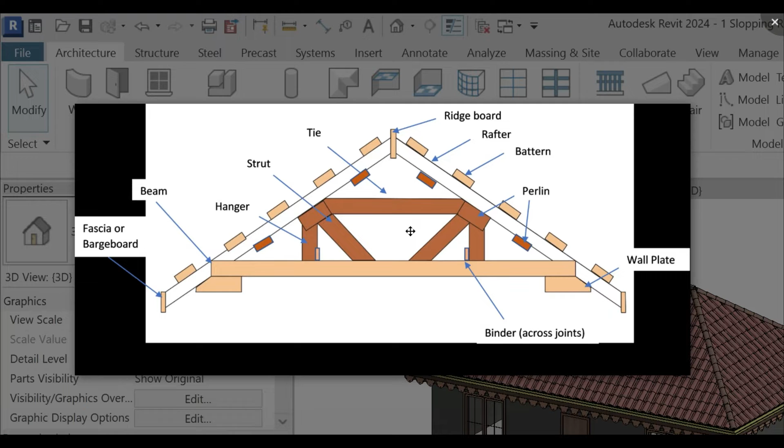To explain this better, let me take you to this particular image, which shows the hierarchy of elements for a typical sloping roof. The wall is supported with the wall plates, then we have this joist or binders, with the truss system depending upon the structural consideration, followed by the layer of purlins, then the common rafters and the hip or valley rafters. This is the configuration, and finally on top we have the battens, which will take the actual roof tiles.

So we are going to design all of this in 3D today, and I have already designed that particular thing. This cross section displays it: we have the wall plates, then the truss, the purlins, the common rafters, and the ridge members and battens which are supporting the actual 3D roof tiles.

This is the exploded view of that particular thing which we are going to design today in Revit from scratch. Also, let me take you to this particular 3D, which shows the designing of this sloping roof, which has this unequal pitch on both the sides.

This is nothing but, if you guys go to PTSCAD app on YouTube, under this playlist Revit BIM, this entire tutorial has been published, the house villa design, wherein I have been showing you how to design this particular roof.

But what I just discovered while designing this particular roof is that there is a flaw with this, a simple glitch, wherein for this project the roofs that have been designed have roof tiles which are not reaching up to this particular ridge board.

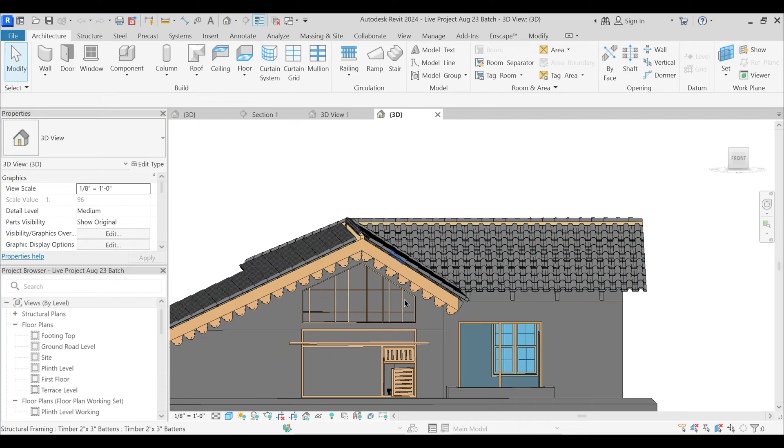Okay, fine. So that is a small glitch, and I'll just explain to you by the end of this video how to rectify this particular thing.

But before that, I'm just going to show you the basics of this particular thing, and also that tutorial doesn't display the designing of this 3D roof tiles, this ridge, this valley tiles, and this ridge member tiles.

So all of that I'm going to show you from scratch, wherein we are going to make use of different template files. We are going to start in a fresh new file, wherein I'm just going to say that wall and level 1, top constraint level 2, finish face exterior, and I'll just draw a simple small cube, select that and make a copy of it.

Okay, and I'll just go to architecture, roof, and roof by footprints, placed on level 2. And with this overhang of 2 feet, I'm just going to create one simple hip roof. And that has been created.

And why is it showing two of them? Delete. Yeah, fine, that's okay.

So now we are going to design step by step all the members. So as per this image, the first member that will follow as the wall plate.

All these steps are clearly demonstrated in this particular tutorial also, but there was a small glitch which I just mentioned, which we are going to rectify today, and it will be a quick revision. So just follow, and I'll just go to level 1.

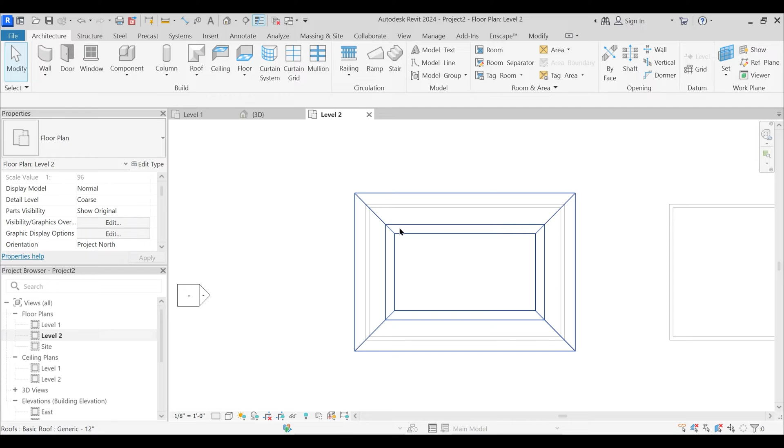So for that, I'm just going to go to structure and beam. And right now you see that by default, no beams are provided.

So I'll just go to load family, and herein I'll just go to RVT 2024 and libraries, English Imperial. And if you have properly extracted your library, then you should find this folder which reads structural framing. This is the structural framing.

And for this exercise, we are going to use these wood members. You can use anything, the modeling process remains the same, whether it is concrete, RCC, steel, aluminum, or anything. But for today's exercise, we are just going to use this timber.

Okay, fine. And I'll just open and load this particular simple beam family. And now if you just go to this family section and expand it, then under structural framing, you would have loaded that timber beam structural framing.

Which reads 4x6, and just go to right click, edit type, and open up that template file. Herein I'm just going to go to family types and make a small change, wherein I'm just going to make this structural material, which right now is an instance parameter, into a type parameter.

The reason being, I'll explain you while doing the modeling part why I need to change it into the type property and not the instance property. I'll just explain, so just try to follow.

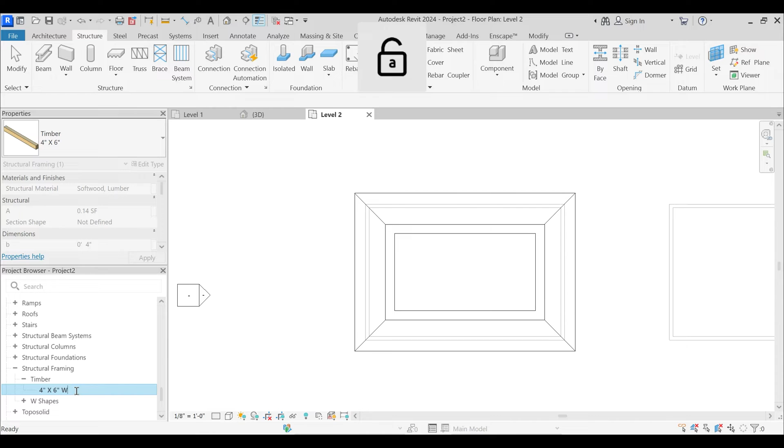I would just like to be specific because we are going to define a lot of them. We are going to design a lot of different members within this one family, so I would just like to be specific.

Okay, fine. I'm going to drag this particular beam and snap to the center of this one to two. I guess that has not snapped properly. Let me just hide this particular roof and drag it from here to here, from here to here, and all of them.

Okay, let's just go to 3D. You can see that the wall plates has been laid on the periphery of all that particular walls. Select all of them, SA, and just change this Z justification to bottom, and that will elevate all that four members properly.

Now, in order to visualize that, I'll just select this particular group roof, go to right click and override graphics in view by elements, and I'll just change this transparency to something like 70. You can visualize what is happening, have a see-through, and see what is happening below.

Let's just change this bit more. Override view and elements, and oh, 20, not 20, 70, and okay.

Yeah, fine. So the next will be the ridge member and the hip and the valley rafters. I'm just going to make a duplicate of this.

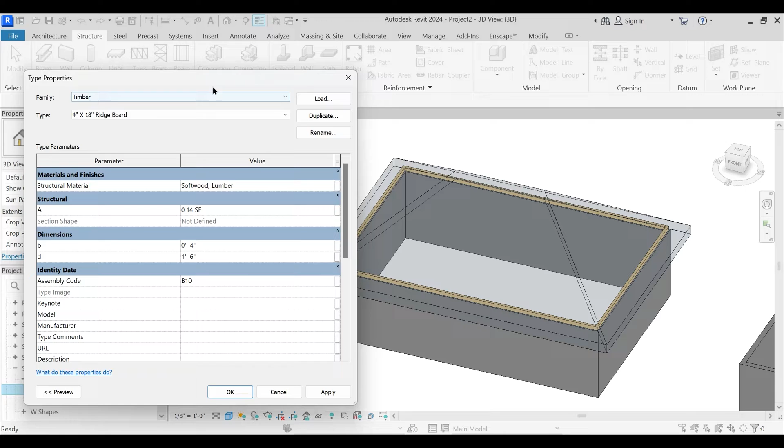Okay, and this should be 18 inches, and the depth should also be 18 inches. As I said, all the dimensions and everything will be pretty much basic and conventional. You can change it according to your design.

And herein this will be 15 inches, which will be the valley rafters. Here too I'm just going to change this to 15 inches. One more, which will be the same size, but those will be

common rafters, and valley rafters, rename, and rafters. Okay, fine, apply and okay, that's okay. So now the four different types have been defined within this one single family.

So what I'm going to do is lay this ridge board. Just drag and drop, and with 3D snapping on, very important, just snap to the uppermost point and here. Okay, so that member has been laid.

Now this next will be the valley rafters. Just drag and drop, select this point and select this point and this topmost point. Okay, so that has been laid.

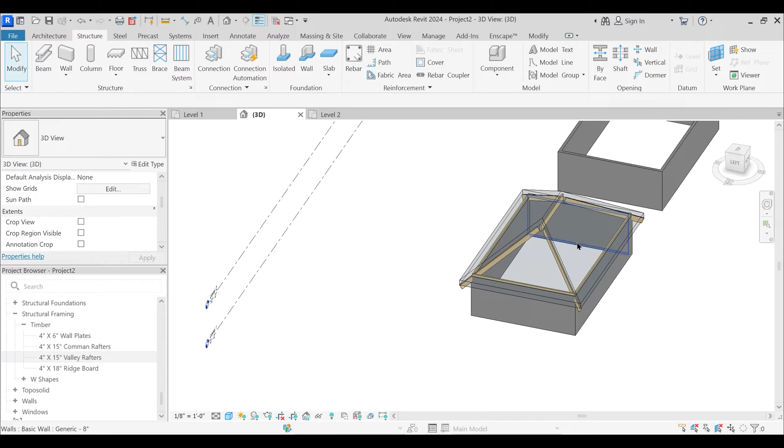From here I will just select this, and from here to here, yes, and this to this. So all the ridge member and the valley rafters have been laid, but we need a differentiation.

So the reason for changing that material part into a type parameter, I'll just come into it. I'll select all of this, SA, and change this Z justification to bottom, and also this Z justification to bottom. The reason was that I wanted to define a different material for all of this so we can have a differentiation.

So I'll just go to the particular ridge member, edit type, and you can see that now we can assign a different material to this. I'll just open up that material dialog box.

And from here in, I'll just open up wood. I'll just type in wood. I'm just going to copy a few of the existing materials defined by Revit, which we are going to use for this particular modeling purpose.

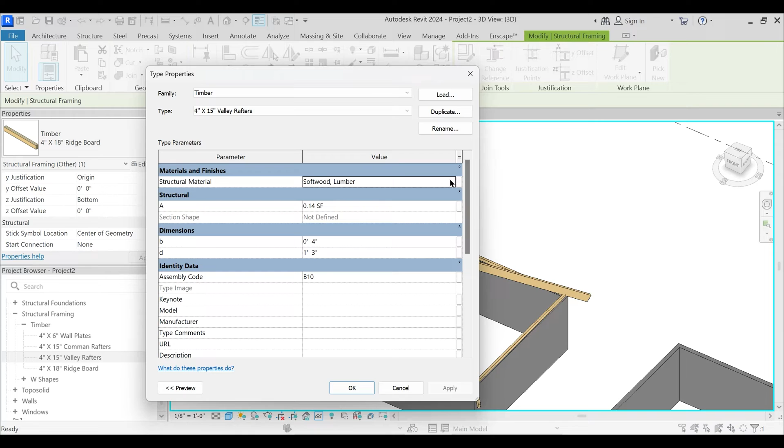And here in this material, I'm just going to use it for that ridge member, apply and okay. Also for this valley rafters, I'm again going to use that same dark material that we just loaded. Okay, apply and okay.

So you see that if I just change this to realistic, then it has changed that material to the one that we just selected.

With this, now I'm just going to take this a bit until it snaps to that particular point. Okay, and just take this a little bit. And just select this two, and drag it. Yes, and this two up till this point.

Now, if you want to have a perfect connection, what method do you need to follow? I'll just show you once we lay these particular common rafters.

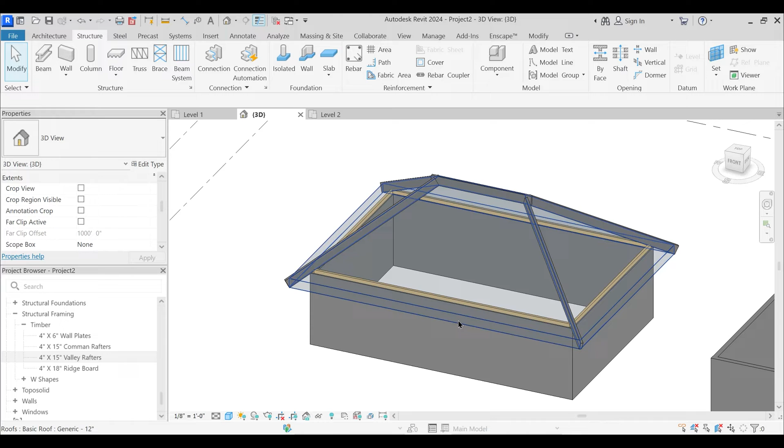So with this, I'll turn on HR and CC again. Now what we're going to do is use this roof, which has a thickness of 12 inches, as a reference to lay the different members of this typical roof. Here's the point where the glitch comes in, which was made while designing this, and the reason why these roof tiles don't reach up to this particular ridge member. I'll explain that.

The reason was that for defining these common rafters, the system I need to follow is to go to Structure and define a beam system. BS is the shortcut. For that, I need to set a plane, and under that set plane, pick a plane. What I did earlier was select this bottom plane, but with that selected, it will not lay those members properly. In order to visualize and lay the members properly, you need to select this top plane instead.

Just select that plane and define a beam system, and I'll turn it to HL so we can visualize those lines. Here I'll create system 1, 2, 3, and 4. Now it's very important to define the beam direction, so I'll select this particular beam direction line. From the center you can click anywhere, but you need that exact perpendicular line defining the direction. You see this dotted line, this dotted gizmo, says that this line is now exactly perpendicular.

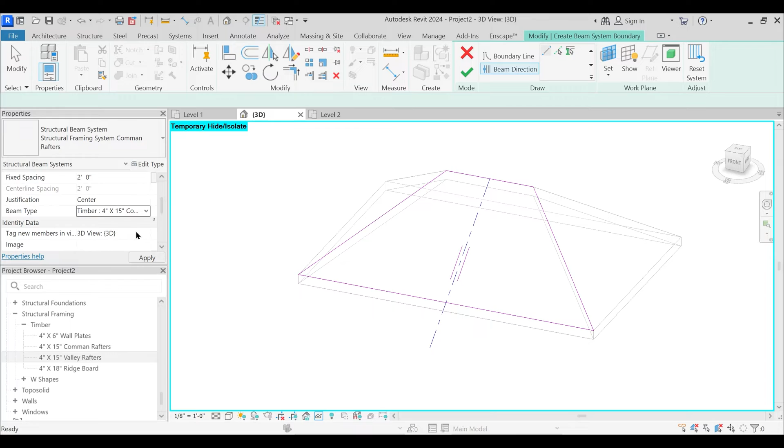So with that, all the common rafters have been laid. I'll turn on CC. Here we have just these two small members, which I'll unpin depending on - let me change this to 25 inches, and that will just get rid of that particular member. Or else you could just select this one member, unpin and delete it. But instead let's use a different size, because size may vary.

So now you see these common rafters are reaching up to the top ridge member, which in this case they are not. If I highlight, you see these ridge members are stopping here and not reaching up to this ridge member. So the only flaw or glitch was defining the work plane, which is very important in Revit.

Now what I'll do is select one of them, go to edit type, and define a different material - existing material sash - for this particular common rafters.

What's the next step? The next step is to now define the purlins. Actually, we were supposed to lay the purlins first - that's fine. I'll select all of them and hide, and I'll also select this beam system and hide it. Now the purlins we're going to lay, which will support this ridge member - these are the purlins - see, those are going to be laid on the bottom of that rafter.

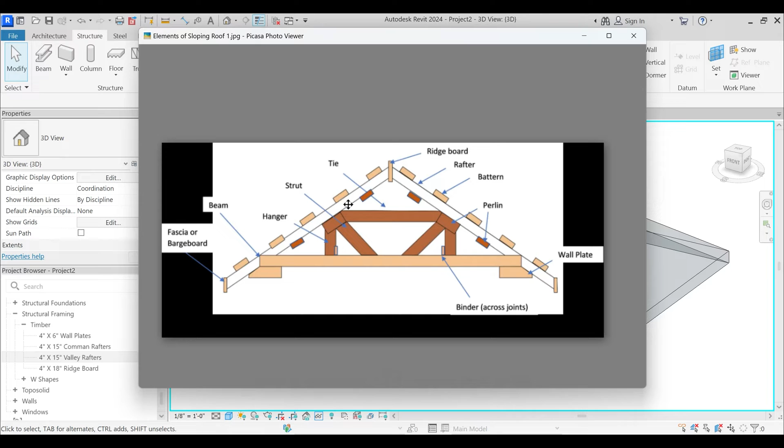So in this case, we're going to set pick a plane, and now the work plane we select is going to be this bottom work plane. I'll select this bottom work plane, beam system, edit type, and duplicate - these are going to be purlins. The reason for duplicating and renaming and creating this structural system every time is that it will help in the modeling part later. So you'll witness this.

I'm going to change the spacing to 3 feet, and since we don't have the type defined, I'll duplicate this type's properties - this is going to be 6 by 4, and those are going to be purlins. I'll reverse this dimension and set the depth to 4 inches.

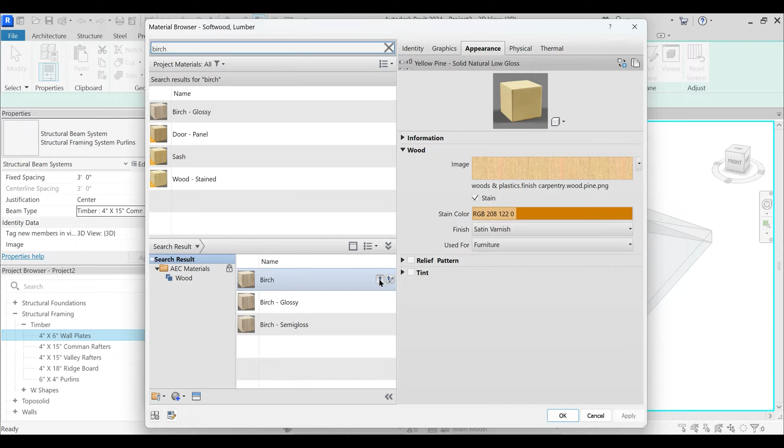Okay, for the material, I'm just going to define existing material that we have already loaded. Yes, birch. I want this not glossy, but simple birch. Okay, apply and okay, apply and okay.

Fine, and now for this particular thing, since that particular purlin has been defined, I can use those purlins for this beam system, but why is it not allowing to? You just need to click in this particular space, beam type, and get out of the command. Drop down and select timber 6 cross 4 purlins, with a distance of 3 feet, and very important, the beam direction.

The beam direction, no, but first we need to draft the boundary lines. The boundary lines are going to be the bottom plane that we selected. Okay, and the beam system and the boundary and the beam direction. Yeah, this is proper. Actually, you can just snap it until the dotted line pops up showing that it's perfectly perpendicular to this plane.

Okay, just hit the checkbox. Fine, so your purlins have been laid properly. Only thing you need to do is press HR and just check here. And what you'll notice is that here there is a problem wherein the last purlin, I guess, is getting cut off.

So let's go to level 2 and change this. Okay, and just drop a section. HH, and yeah, so see here there is a problem. Just select this particular thing and change the spacing, let's say to 4 feet. Okay, and it's absolutely perfect.

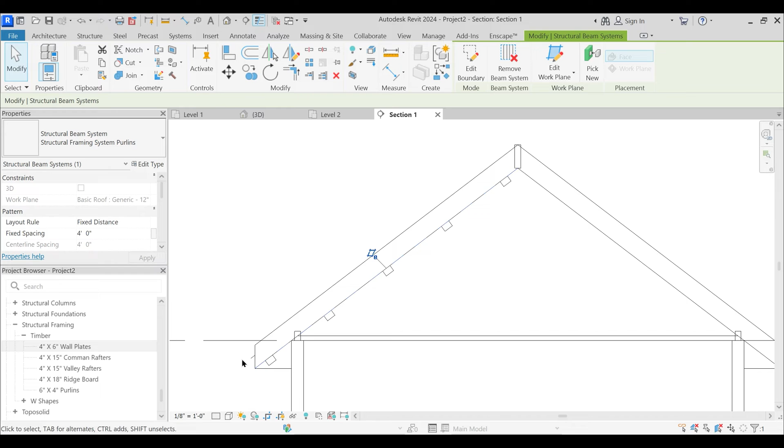Okay, so the purlins have been laid, the ridge member has been laid, the common and the valley rafters have been laid. Fine, and R enter. Yeah, fine, so we have a differentiation.

wherein we need to have a clean joint. Of course, the machine will adjust it on site, but since we are talking about the modeling part and modeling concepts, I would like the things to appear perfect. Right now you can see that the things are overlapping, and the members are overlapping and getting inserted one within another.

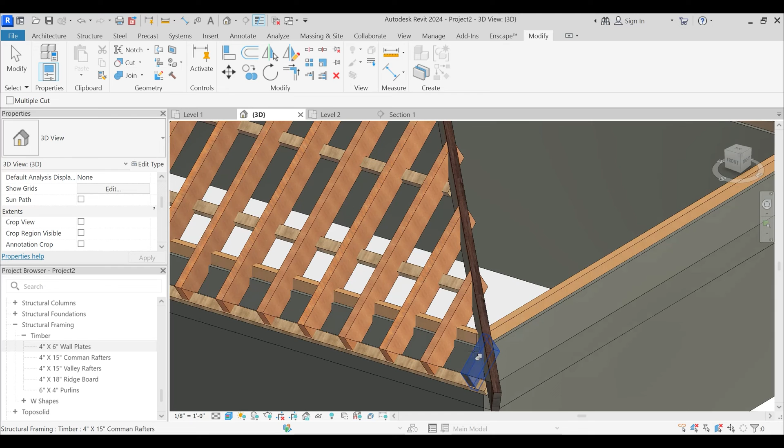So the trick in this case is that you need to select this very powerful command, very important command: notch. Select that individual member and select the member which you want to create the notch joint with. Let's check it for one. And if you drop this down, you have this notch distance, which I'm just going to change to 0. Yeah, but no, that is still not proper. Let's just try it for this, 0.

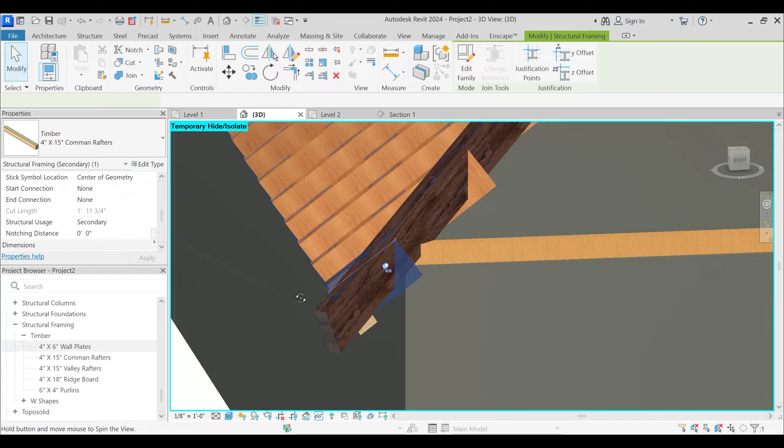I guess that is... let's just HH and hide this particular roof, and notch, select this and this. Why is it not? Yeah, the notch has been created, but because of the way it has been laid, it is not creating a clean joint.

Fine, when we lay these members, then we will understand what needs to be done. Okay, so just HR, and now for this particular face, I'm just going to create both, that is these purlins and these common rafters. Actually, it should create a notch joint. Why is it not? Okay, fine, let's not waste time on that and let's proceed on with the modeling part.

Okay, and again I'm just going to HI and select this roof, isolate this roof, go to structure, set plane, pick a plane. This time I'm going to select this top plane. But let's lay the purlins first. So pick a plane and the bottom plane, and go to beam system, and we already defined those purlins.

Okay, HL, and just draw those four lines, 1 to 2, 3 and 4. Okay, and say that the beam direction should be from here to this. Okay, and rest all the properties same, that is the fixed distance, but I guess that we use 4 feet for that.

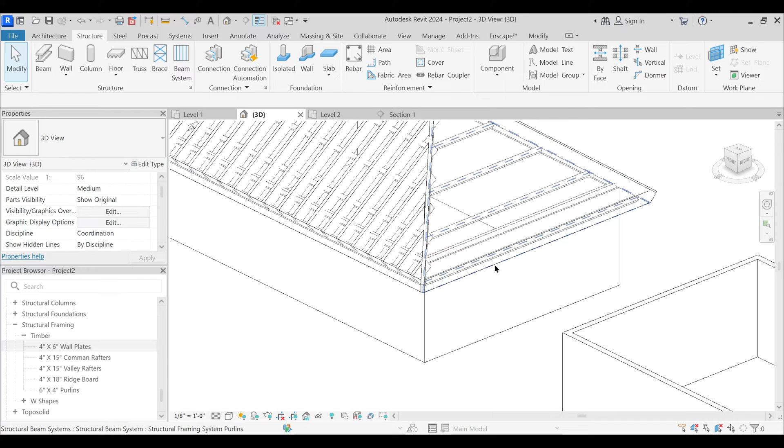Okay, and HR, is that corresponding? Yeah, see, this is exactly perfect. Okay, if I just take you to this particular top view, then you see that the connection follows. Fine. Okay, now the next is that we have to define again, select CC and that roof tab.

Tab until you select that particular roof and isolate it again, and go to set plane and pick a plane. This time, since we are going to lay the common rafter, I'm going to select this particular plane and go to beam system, drop down, and select common rafters.

And the moment you select it, since this is an instance parameter, you have to change it from here also, change this to common rafters, and the fixed distance should be 2 feet. I'll just draw a line: 1, 2, 3, and 4. The beam direction should be essentially this. Okay, 2 feet distance, 4 cross 15 common rafters, everything is perfect.

Hit the checkbox, okay, and now turn on this. So now it is very important to have a proper connection.

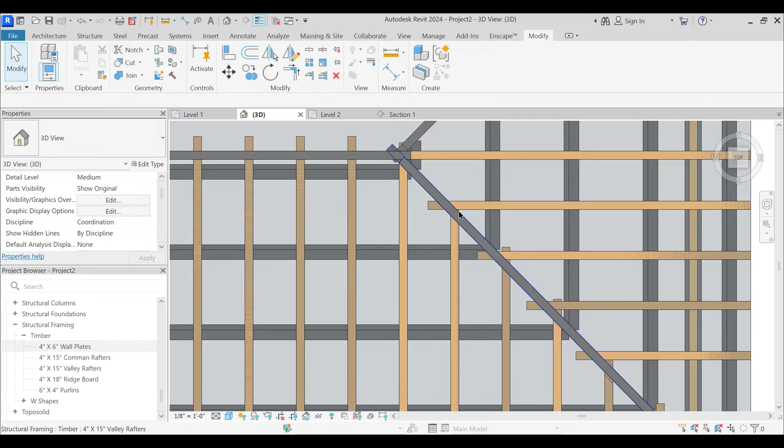In order to make this particular connection appear properly, let's just try that same command, that is notch this to this. Yeah, see, and this to this. But again, I guess that something is the problem here, which we need to figure out.

For that, let's go to this section and turn this to fine. Okay, yes, the common rafters which has been laid. Let's turn on this roof profile. HH, and this is the roof. Okay, and these are the rafters. Yeah, see, the thickness of that particular roof is 12 inch.

But for this particular rafters, let me turn on to CC and no wireframe. The common rafter that we have laid, edit type, and you see that its depth is 15 inches. So we actually need to flush this in order to have a notch connection. We essentially need to notch this, and you see there is a 3 inch difference. Okay, so that is the reason.

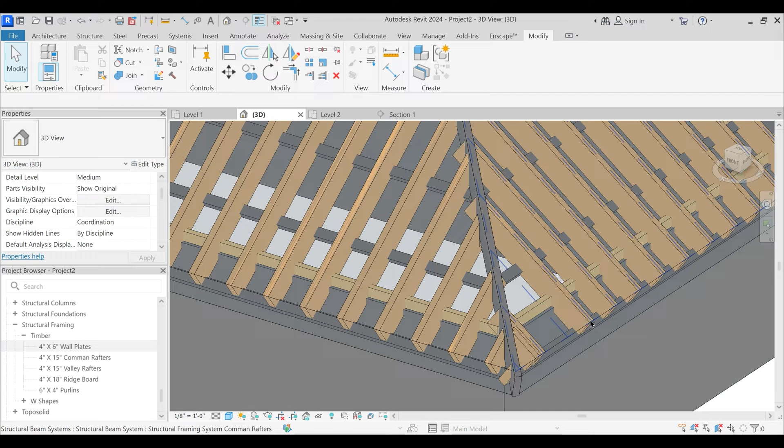Also one more thing, if you just select this particular beam system of common rafters on top, which is exactly on the top, if you select this, then the fixed spacing distance is 2 feet 1 inches. So that same should pertain here. What I will do is press tab until I select this beam system and say that the fixed distance should be 25 inch.

Okay, remove notching, fine for now, and that will flush. At the same time, select one, that will select all this particular common rafters, and with Z justification to top, the Z offset value should be 3 inches. Okay, and with that, now if you just see, then that connection is flushed. And the extrusion that we have is on this face, 3 inches. Yeah, fine.

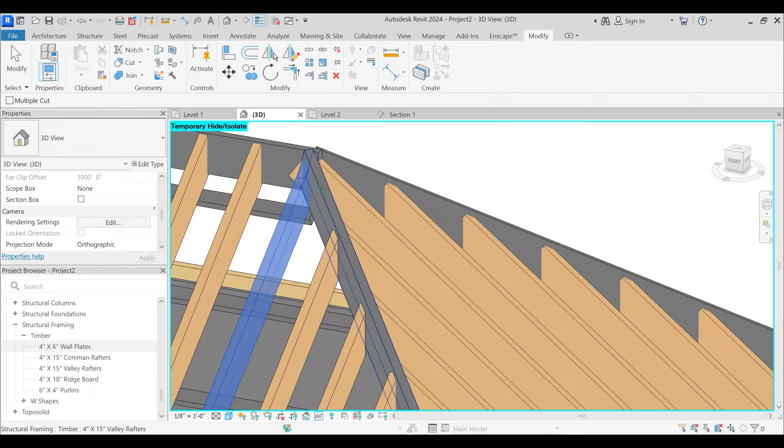So now with this, if I just go to 3D and hide this particular roof, and now if I just apply notching to this with notching distance to 0, and this also, let's try it for all these members. Notch 1 to 2. Yeah, fine. And with that, you see that we have the perfect flush connection that we wanted, and you have to do it for all the members.

Let's check whether, okay, and then select the peripheral members which are connecting with this valley rafter, and with all of them selected, just change this notching distance to 0. Okay, and with that, now if you just check in top level, okay, and we have a flush connection. So that is how, one step you perform, and then okay, so with this now you see that we need to notch this as well.

So notch this member with here, yeah fine, and likewise notch all of this to this valley rafter, and just drag it a bit. Select both of them and say that the notch distance should be 0. Okay, and that will perfectly join. Likewise here too.

See, if I just select all of this, 1, 2, and all of that will now perfectly create a flush connection. Okay, and with all those members selected, just change this notching distance to 0. And at the same time, we need to apply the notch joint here as well, but let me just drag it a bit here, and this should follow.

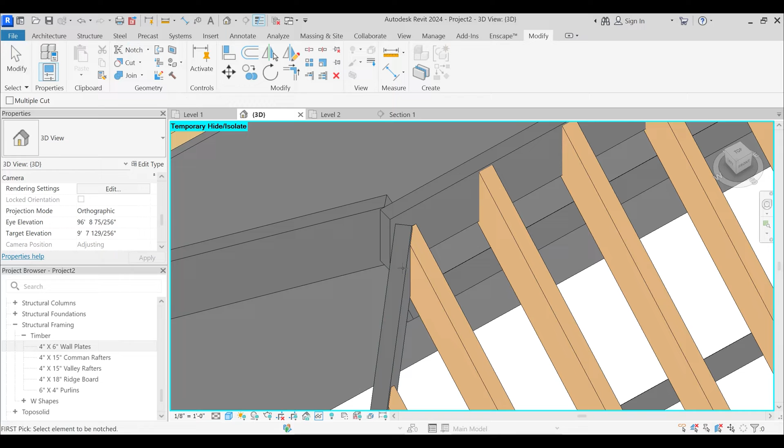Irrespective of this, the machine will follow the conventional method and join this. But since we are talking about the modeling part, so that's why I'm focusing so much on it.

Yes, notch this to this as well. Notch, and yes, we need to drag it a little bit. Okay, select both of this and zero. Fine, and we have a clean joint.

What we just need to do is change those, again define a different system and call it battens. You also need to change it here in instance properties, wherein right now it is reading purlins, so you need to define a new type. Go to type properties, duplicate this, and call it 1.5 cross 1 inch, and that should be battens.

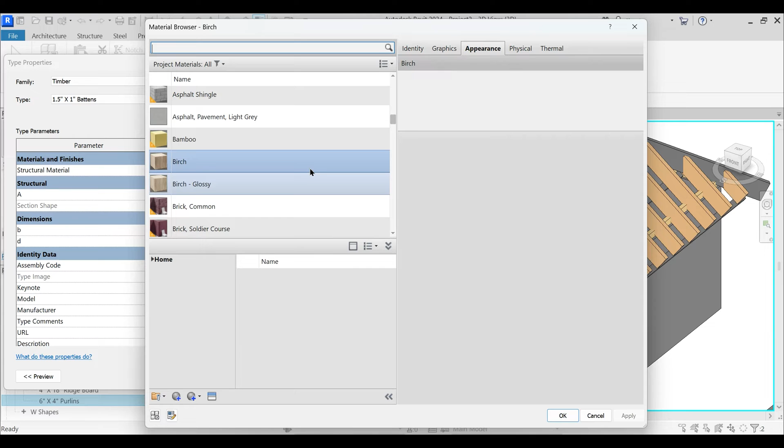Its size you can decide: 1.5 inch, cross 1 inch. Okay, and this material should be birch, so we'll have a differentiation. Okay, and with that, just click in the space.

Where is that? Yeah, battens. With that selected, just change this particular type to battens. Okay, so with that, the thing is done.

So those battens have been created, but they are right now at the wrong work plane, and also the fixed distance, the fixed spacing should be only 15 inches. Likewise, we also need to select these battens and change this fixed distance, all of which are instance properties, so you need to change it instantly for all of them.

Change this to battens. With this, now just go to section 1 and select all, so all of that will be selected. Just press move, and with this join, yeah, but it might have selected the battens on this side also. So just do one thing, select all, battens have been selected, deselect this one on this face, and go to section 1.

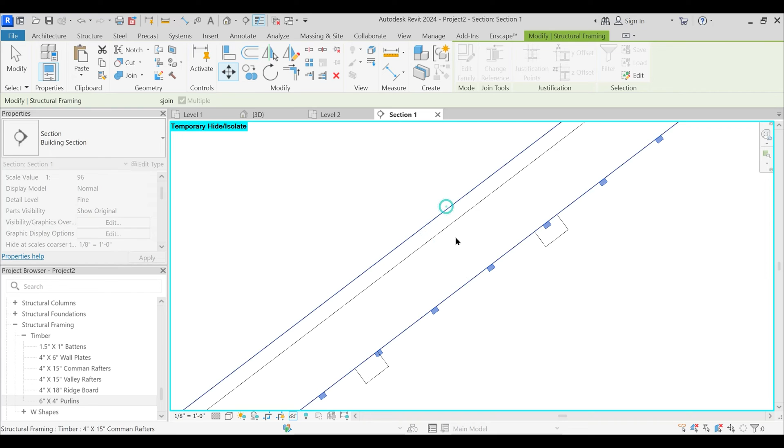With that, now you'll be able to move this and join, and still not. Why is it not snapping? Move, and why is it not selecting? Select all, let's go to top, and let's deselect this. Also let's deselect this. I guess there is a problem over here.

Let's just redo this part, compute it for this face first. Okay, let this system be there, battens. And from here I will select all of them. So the one created on this face has been selected, move and constrain, and yeah, see now the snap point is coming, which earlier was not coming. So you need to be very particular.

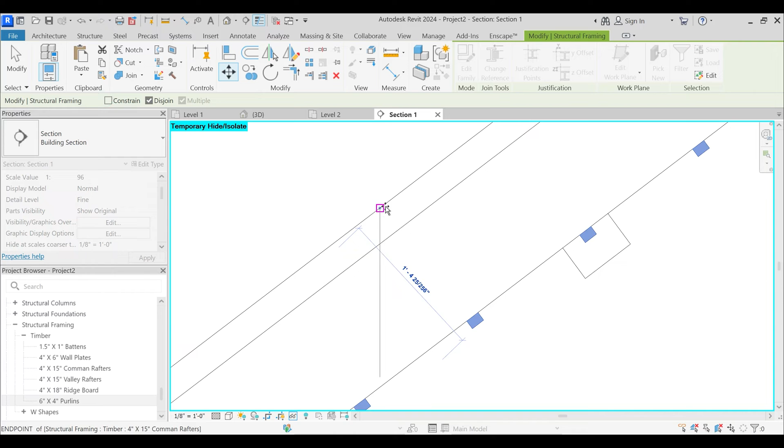Move, enter, constrain uncheck, and with this disjoin check, just move it from face to face. I hope this should have laid it properly, perfectly. Okay, fine, so that has been laid. You need to get rid of these extras, delete.

Now we will select this batten, the batten that we created on this face, and change this fixed distance to 15 inches, and this to battens. Okay, so that has been created, but we need to do it properly.

Select all, and deselect all of this. With that selected, if you just go to section 1, you cannot visualize it because that is the vertical section. You need to draw a horizontal section, go to that particular section. Fine, so we can visualize those battens.

Now again coming to 3D, I'm just going to select one of them, select all, shortcut is SA, that will select all of them. With that, just go to section 2, and with all that selected, just move it, with constraint unchecked and disjoin checked, move it from this point to this point.

Once again, why is that doing it two times? Yeah, fine, okay, so that has been done.

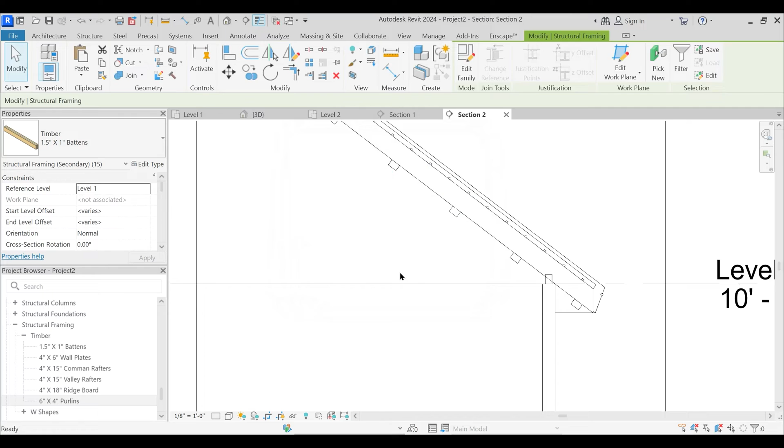If I just change this to... oh sorry, just press undo and turn it to fine. Again coming to 3D, select all of them, and deselect them. We snapped it to the wrong face, so move, enter, with constraint unchecked and disjoin checked, just move it.

And fine, that has perfectly moved it in place. Okay, and just get rid of this one element, you don't need it.

Okay, and with that all the members have been created perfectly. Fine, no issues.

Now the last part is that we need to define the actual floor roof tiles onto this particular face in order to complete this. Okay, so let's just do that pretty quickly.

For that I'm just going to use a different template file of Revit, where I'm going to say file, new, go to family, and change this to family templates and English Imperial, and change it to curtain panel pattern based. We are going to use a pattern based family for this.

Okay fine, so I'm just going to change this size to, let's say, 15 inches across 1 foot. Now from here, I guess that this should be 1 feet and this should be 15 inches.

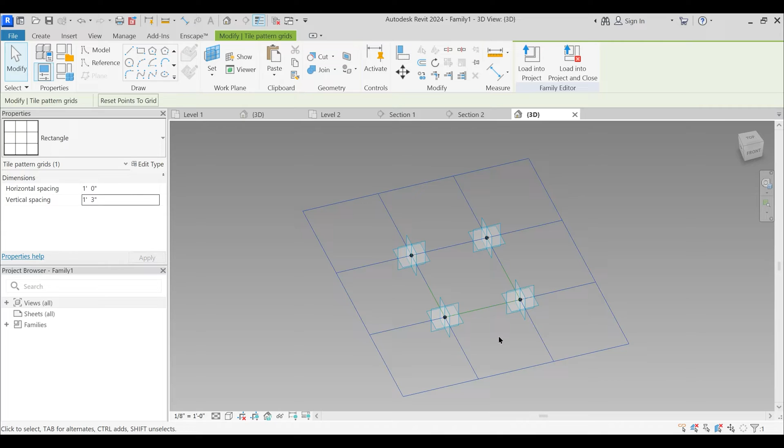Okay perfect, now I'm just going to select this particular set plane, set work plane, and select this plane associated to this point, this adaptive points. Okay, and just go to front elevation.

Okay, say that model lines, center-ends arc, radius, click to center, expand, and just click 3.25 inch. Okay, and then three and a half, come to this point and draw all the way to this point. Okay, so that arc has been created.

Fine, now one another, again click that same. If the radius of this is 3.5, so this should be, click this center, 3.25, 3 and 1/4 of an inch, and click this point, center-ends arc, 3 and 1/4, come all the way down till here and then draw it.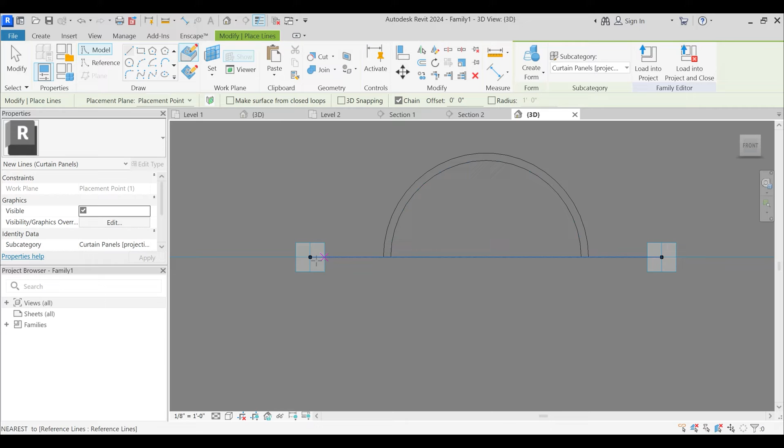Okay, fine. Now let's first draw the horizontal lines, so I'm going to draw a line on that same work plane from here to here, just come up 0.25 inch, and then join it. Okay, and I'm going to use this particular split element tool and split both these lines, and join this to this and join this to this.

Okay, and with this I'm just going to select this entire element and move it, let's say 1 inch, and that would be 1 inch high. Now what we are going to do is create the same section with some different dimensions, but on this work plane.

So what I'm going to do is set work plane, and now this time this should be the work plane. Okay, and then again go to front elevation, and this time center and arc, click snap to the center, but go only 3.25, 3.25. Okay, click snap to center, and let's say that 2 and 3/4.

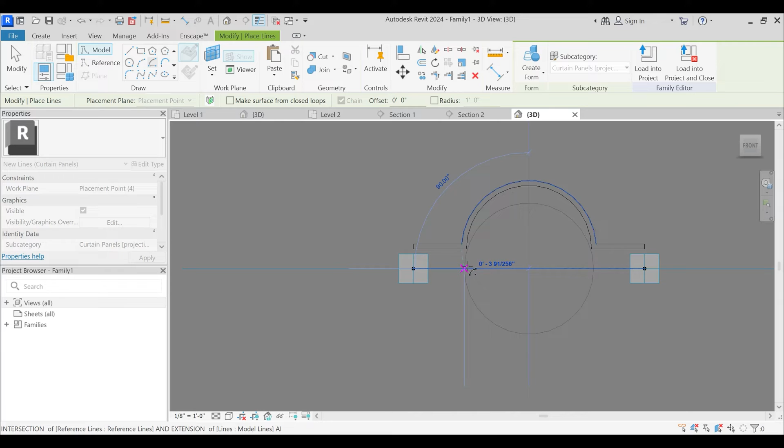No, 2 and 3/4 would be too less, it should be 3.5. Okay let's create 3.5, and then complete it. Okay, select this and change this to 3.25. Okay perfect, and then one more, and that should be exactly 3.

You will not follow right now what I'm doing, but once I complete this exercise, then you will get to know what was the purpose of doing this.

And just, oh, created on the wrong face, and 3, and just drop, and yes okay. And now this same lines, 1 to 2, and 1/4 inch, and thus join them.

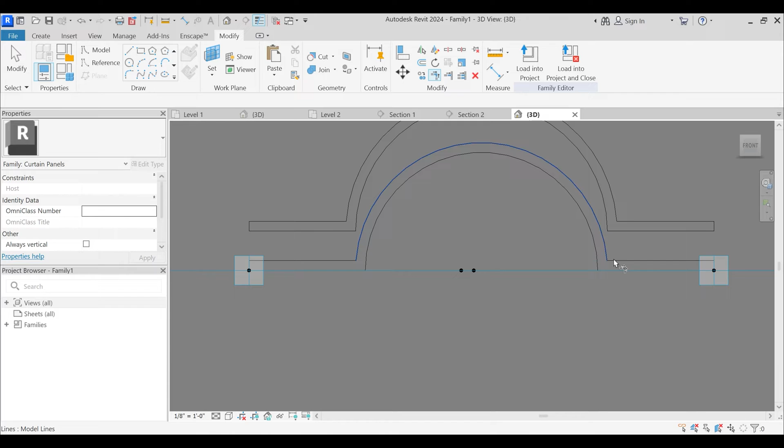Okay, and with this split elements tool, just 1 and 2, and join this, and join elements, yes, but I guess we need to split it, and see it left, so it doesn't matter. Create one more line over here from this point to this point, okay, and that entire element has been created.

What we just need to do is select this and go to top, and move it with constraint unchecked and disjoint checked. Just move it 1.5 inch, okay. And with that, select this both and just create form.

So now, do you understand the purpose of creating these two different cross sections? The reason being that I wanted to create this style in such a way that when it overlaps in the project environment, it should have this overlapping volumes. So when you have a water runoff, the water doesn't penetrate in. The cross section on this side is larger and this is smaller, and also it has been given a displacement of 1.5 inch. So this was the purpose.

Now what we just need to do is select this entire chunk and material, just create one material, roof tiles material. Okay, and we don't have that.

So we need to create one. So duplicate, and just call it roof tiles material. We will change it directly in the project environment, but right now I have just assigned that.

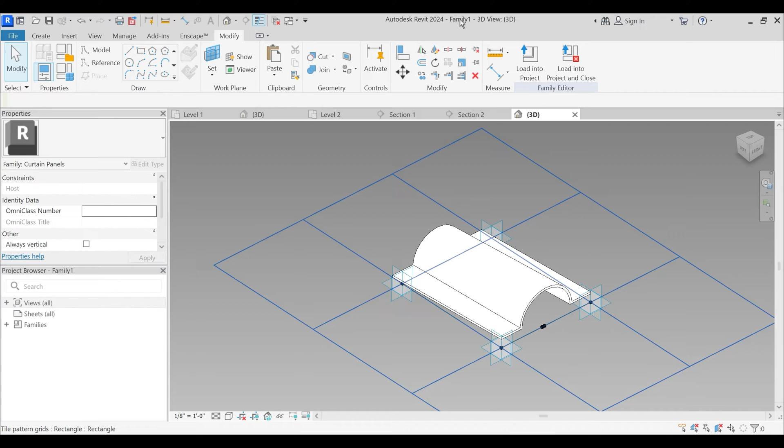Also now this family 1, we have to load that into this particular project. So I will just load that into the project. And herein, if you just go to curtain panels, then that family 1 has been loaded.

I'll just rename this and call it roof tiles, and also rename this roof tiles. If you just go to type properties, then you see that the material parameter didn't pop up.

Let's go to the, let's delete this because it's loaded in the project environment, so we don't need it anymore. And then right click this and edit it. Roof tiles and edit it.

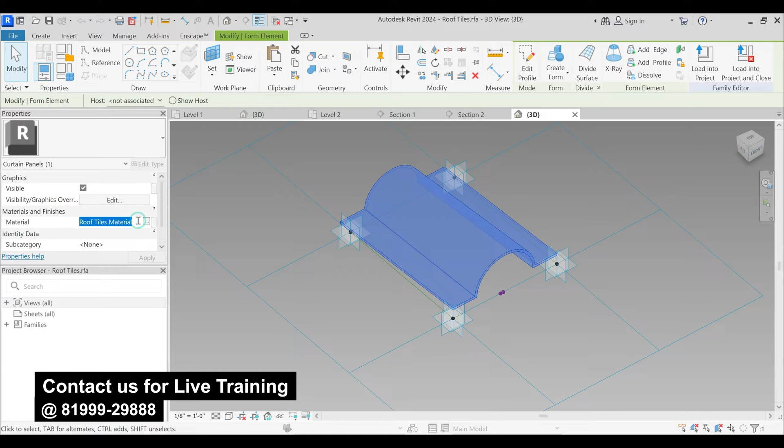And we have created this roof tiles material. Yeah, so why didn't it appear here? Sorry, absolutely sorry, I'm supposed to select this button, not that button, but

this button and create a parameter. Sorry, and that should be roof tiles material, because we are not defining that parameter here, we are just passing it on. So now this type properties will have that roof tiles material parameter, which is our material parameter.

And just load that back into the project, override existing version. And now if you just go to type properties, then you have this roof tile material, which you can assign a material to. But before that, I would just like to close this and go to 3D view.

Now we are just going to perform the last step, which is the most important part of this particular exercise, wherein I'm just going to select this particular roof, press tab until you find this 12-inch generic roof, and hide it.

Okay, fine. And now what I'm going to do is go to massing and site, and we are going to create a mass which we are going to manipulate in such a way so we can lay the roof tiles properly.

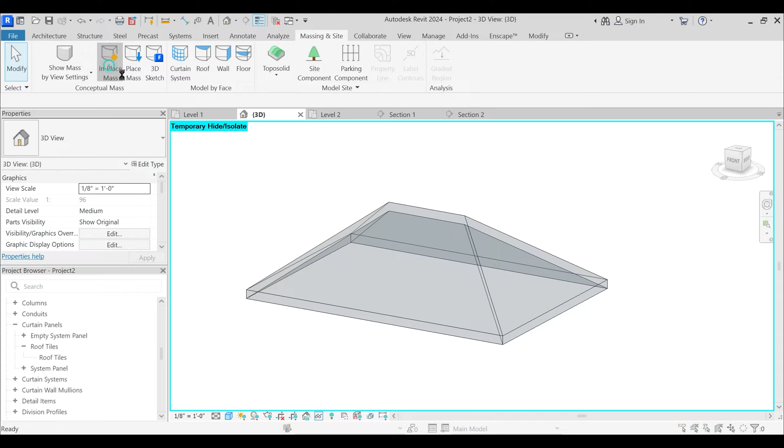I'm just going to say in-place mass, and just call it roof tiles. The family with this name already exists, do you want to specify a different name. Yes, so let's say roof tiles mass file.

Okay, and then set plane, very important step. Now again you have to select this top plane. And with that selected, just draw 4 lines. 1, 2, 3, 4, and yeah, done.

And with that mass selected, just create form, solid form. So it will by default select this value, just change it to 1 inch. That's enough. And go to section 1.

And with that created on this face, on the top of that particular 3D roof, just extend it and change its direction from here to here. Select this bottom part and snap it here.

Okay, and now go to 3D, and with that selected, just press tab until you select this topmost part, and then just divide surface.

And with that divide surface, now you enter the value that you have defined in that template file, that is 1 foot by 15 inches. That is the value - 1 foot by 15 inches was the value we used to design that roof tile in the template file.

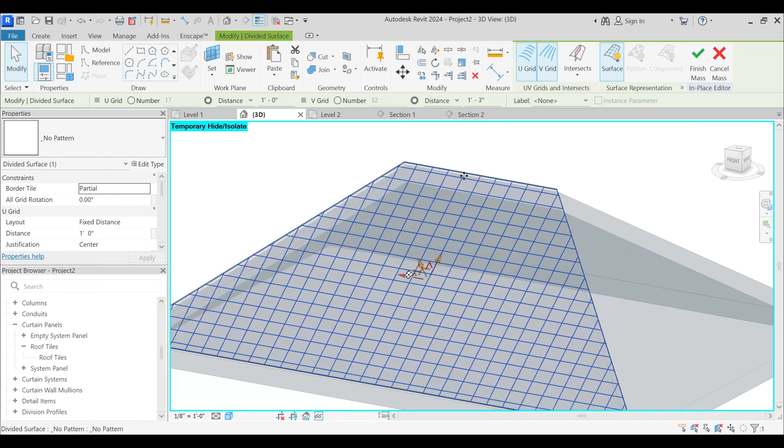And with that, now just drop this down. And when you drop down, you see that under rectangular pattern, you have your roof tiles perfectly positioned. And with that, you see that your roof tile has been laid.

I guess this distance was supposed to be different. Now there are a couple of trial and errors, guessing games. Yeah, see, and with this, the roof tile has been perfectly laid following that slope and that gradient and that face selected. Okay, we again need to make some changes.

Beginning, and yeah, see. So we will have a full tile at this portion, and for this ridge member, we will have a cut tile. Anyways, this portion is going to get hidden.

Okay, fine, perfect. And now if we just select this, and if I just go to edit type, then you can assign it a material, roof tile material, and

let's define a material for that, wherein I'm just going to change this to this color, and yes, and also apply a bump.

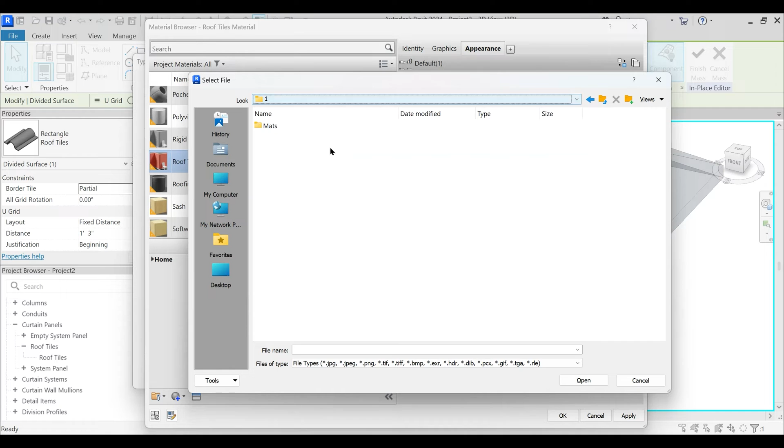Okay, and the bump pattern should follow C, program files, common files, Autodesk shared, materials, textures, and one - this is the path. If you have properly extracted your library, then you will find these different textures that are provided by Revit. And from this, I'll select this image, which will provide a bump and make it look like some glossy surface.

Change this amount a little bit, apply and OK. Apply and OK. And with that, now if I just press R enter, that is realistic, then you see that your roof tile has been created. Okay.

This color seems a little bit eye-catching, so what we can just do is define a different color. Apply, OK, and yes, this looks better. And you can see that it exactly appears like it should.

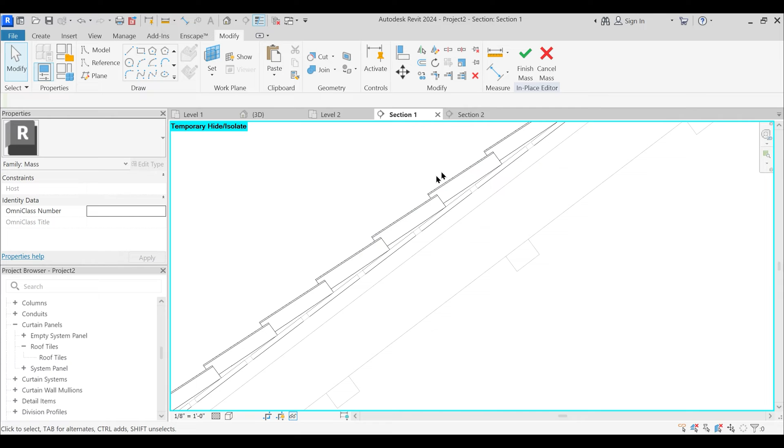But what's important is that now if you just go to section, then you see that when you have a water runoff on this, the water won't penetrate and you have the overlapping volumes. And we have perfectly achieved this particular thing.

See, somewhat like this, wherein you have this overlapping volumes here too, and in vertical segment also. Okay, so this is how you design the roof tiles, which was the main purpose of this particular exercise. And finally, now the ridge tiles.

The ridge member and the valley rafter tiles, which is actually this one, and we are going to create that using a slightly different template file and different method. The method will be the same, but the template file will be a little bit different.

I'm just going to go to file and new, and this time go to family templates, and list, and English Imperial, and this time I'm going to use this generic model template file, and open up.

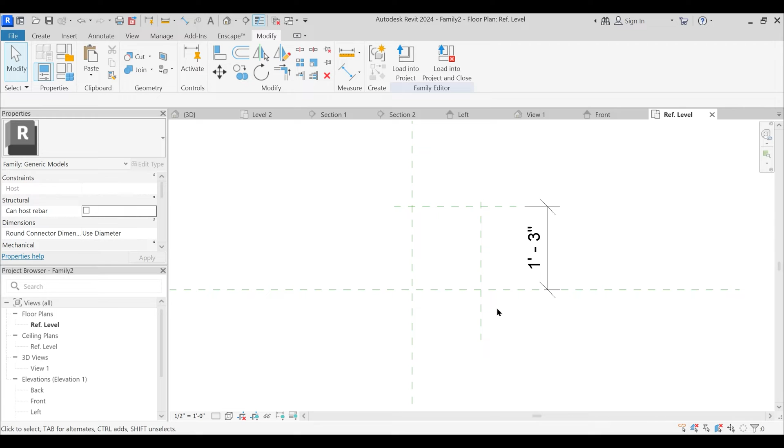Herein I'm just going to define reference plane 1 and 2, and this is going to be 15 inches again, yeah that's fine. And this is going to be only 1 feet, not even 1 feet. I don't exactly remember that.

Let me just open up this, edit family, select this single tile, edit family, and reference level, tile depth and tile width is 8 inch only. Okay, fine, so sometimes even I need reference tile depth and tile width, so that's fine.

Okay, and where is that? Uh-oh. Oh, this is not that file. Yeah, this is that file.

So this is going to be a parameter, which I'm just going to call tile depth. And this is going to be one parameter. This is going to be tile width. Okay, and this is just going to be 8 inches.

Now what I'm going to do is define two cross sections here too, just like we did for that particular template file. We need to repeat that process here too. Okay, and it by default opened up these four views, but that's okay.

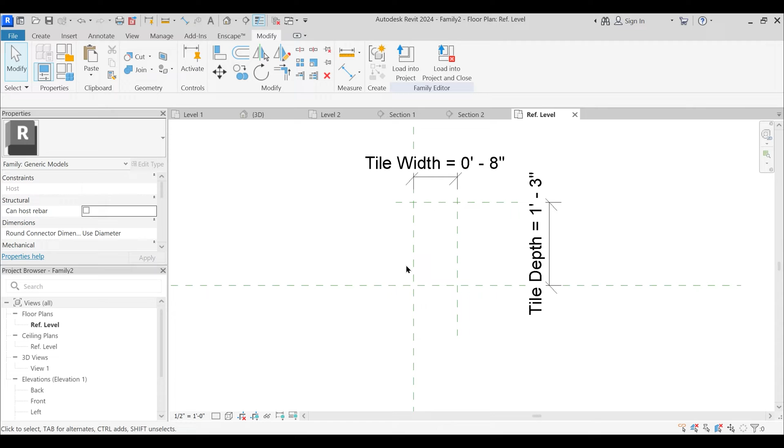I'll just go to create and set, and pick a plane, and this should be the work plane. Now let's define one section so we can just reference that particular thing across that section, and section 1.

And now what I'm going to do is, again, I'm going to create - no, this time I'm going to create a blend. Okay, blend, so that blend with that edit bottom type, I'm just going to use this, and I don't have anything to reference, so I'll just draw one simple line, and then create and modify blend, center and arc I'm going to create.

Okay, and this offset at 0.25. Okay, and we shouldn't have deleted that line. Anyways, split element and join this to this and this to this.

And herein we will have a slightly different section for the top, so now I'll say edit top, and again this should have a smaller cross section, wherein I'm just going to define this. Yes, created on the wrong side.

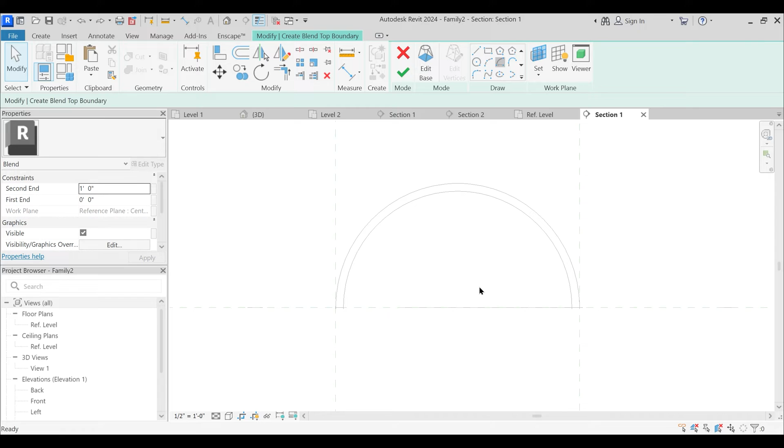Center and arc, center, and this too. Or why is it doing this? Yes, okay, and offset it 0.25, and split element.

We are just using the drafting skills with Revit. Okay, and with that, I'll just finish this. Okay, and if I just go to 3D, then you see that particular tile has been created with bigger radius on this side, I guess.

Oh, it has snapped to the wrong plane, so this should actually be, yes, 15 inches. And now you see that we have a larger radius here and smaller radius here.

Fine, so now what I'm going to do is use a different template file for this, new and family, and this should be family templates and English Imperial, and generic model line-based family. Yeah, and open it.

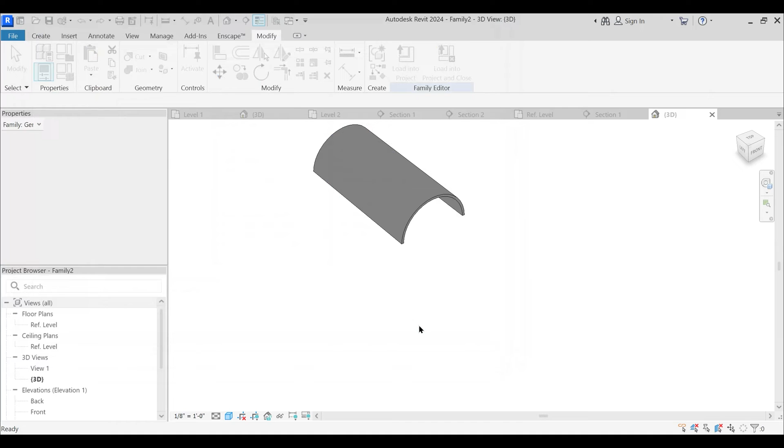And before loading that particular generic file into that, I'd like to assign a material parameter, not making the mistake we made last time - associate family parameter and create new parameter. And this would be ridge tile material.

Okay, fine. And then load it into this family 3. So load and load it into family 3. Okay, and with that, now just come to this and delete this particular file. Okay, and just expand this generic models and call it rename ridge tile.

The purpose of renaming is that whenever you need any modifications or changes, you can easily find that. Rename ridge tile. Okay, and then just drag and drop, press tab until you snap here.

Okay, and what you need to do is now just align, place this center point here. Let me make sure. Yes. Okay, and then just align this to this and lock.

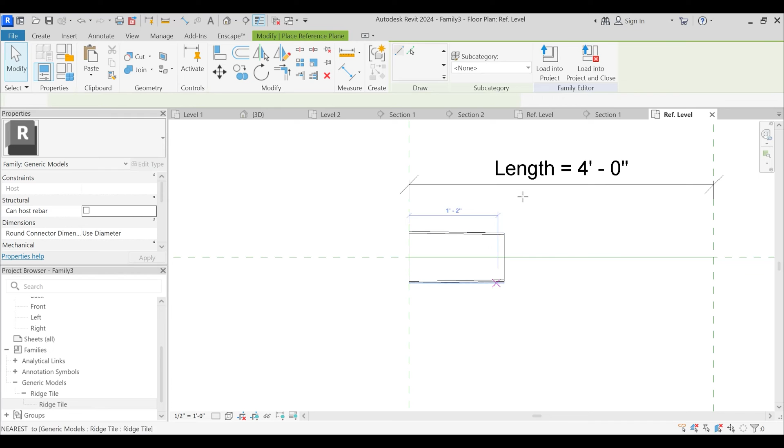Okay, and herein create one reference plane and create a parameter. What would be that? That would be tile width. Yeah, tile depth, I guess. Tile depth.

Yes, and if you remember, this particular thing has one type parameter which is tile depth. Tile width we don't need to pass on, but tile depth I'll make it equal to tile depth, apply. Okay, fine, so that will snap and just change it to 15 inches and align and lock this.

Okay, now we need to create one more parameter, and that would be buffer. Two more parameters, buffer. And buffer is that we need to create that in order, because we are going to have overlapping volumes for that. Fine, so herein I'm just going to create one integer parameter.

Number of tiles, and that would be integer. Okay, and group it under constraints. Fine, okay, so what would be that particular integer parameter? For that, one more parameter I need to define is that which should be actually equal to length.

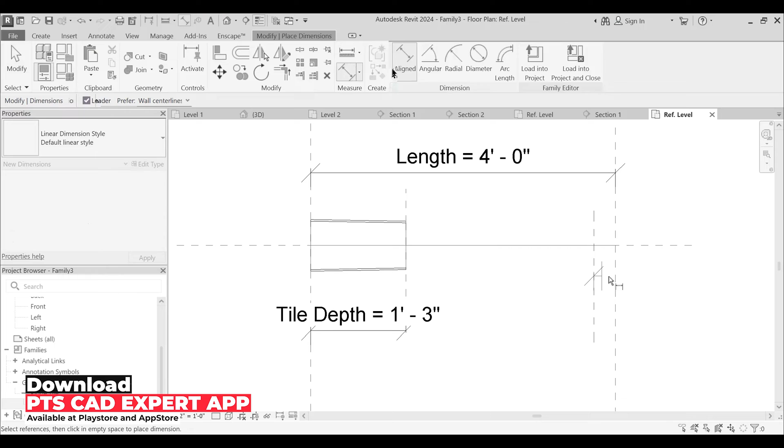So what I need to do first is create a parameter over here, and that should actually be equal to buffer. Oh, it got deleted, fine. Buffer, and that buffer should only be 1.5 because you're going to have overlapping volumes of 1.5 inch.

Okay, and just as this length, we need to create one more parameter, that would be tile - number of tiles, let's say. No, number of tiles is that integer we are going to create. Tile width, just a parameter, but that would be a type parameter and not an instance parameter, and that should be same as this length.

Okay, so now I'm just going to go to type and define an integer parameter, number of tiles, and the data type should be integer. Okay, and I would like to group it under constraints. Okay, and that number of tiles should now be tile width divided by

tile width divided by what? Tile depth. Yes, tile width divided by tile depth. Okay, and just click OK.

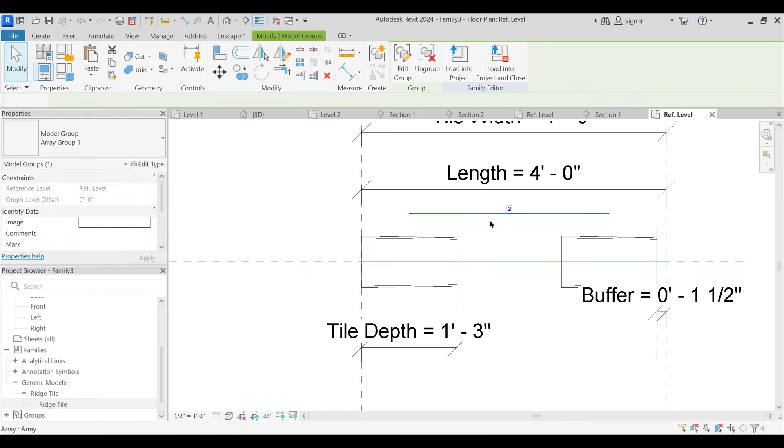But with this, I'm just going to select this and create an array, click this point and snap it to this buffer. Okay, the reason being that we want this overlapping volumes, and that should be equal to number of tiles. No.

Again, I need to check once. This is really - and this edit, oh sorry. Go to 3D, and you see that this is very difficult and there are a lot of steps. So sometimes I keep forgetting the steps. So I need to have that reference file always open.

Tile depth should be 15 and that should be length divided by buffer. Oh okay, fine, buffer. Yes, so just delete this and

yeah, so there is no need of the buffer parameter here. Tile width divided by buffer. And that buffer should be 1 feet 1.5, not 1.5. Okay, and just apply and okay. Fine, sorry guys, I just forgot.

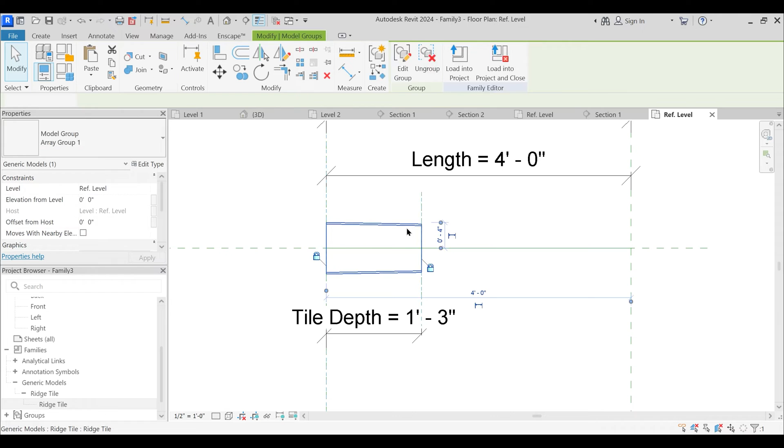So that's why. Now, first is that this is already a group, so ungroup it, select this and say array, select this point and say to last, with group and associate, just pick this. Okay, and with that, now when you select, first you need to align this face and lock it, and then select this and change it to number of tiles. Perfect, and now when you expand this, it will properly expand.

Fine, so now this template file has this ridge tile material. Okay, and now pass on this family 3 into the project environment. What is family 2?

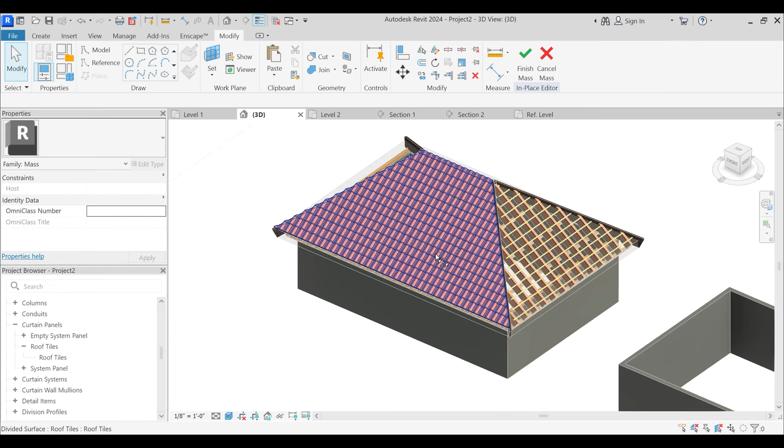Yes, this was not needed. Load it into the project environment. And you cannot place it just like that. What you need to do is just turn on HR and finish mass.

I will select this particular valley rafter. This was not supposed to be a valley rafter, this was supposed to be a ridge member, ridge board. Yes.

And it's a justification to bottom. And yes, then why is it not appearing properly? Section 1, yes, and ridge board, and it's that justification to bottom, and this 18 inches. Fine. So even 18 inches is less.

That was just, and even that is not enough. 24 inch, 2 feet. Okay, and that would be enough, I guess. Yeah, okay, that is just the ridge board, and that might have removed the notching.

So again, we need to select this 1, 2, 3, 4, 5, and 6 HI and isolate that and have a perfect join condition. This is really time consuming, guys.

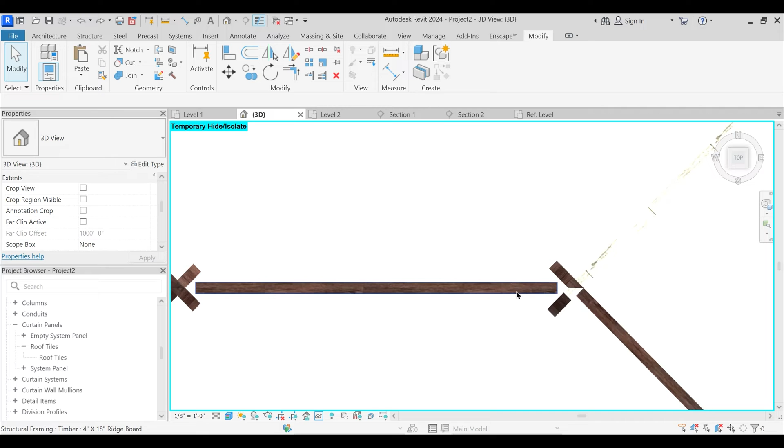Yes, and here too. Yes, okay, and now the notching has also been applied and it's perfect. Valley rafter, yeah, absolutely perfect.

Okay, and now what we just need to do is that HR, and also the width of this valley rafter, the depth of this needs to be increased. Okay, so edit type and rename this and call that 24-inch ridge board. Okay, fine.

But this valley rafters, edit type, and let's try 21-inch for this. Apply, yeah, that's perfect. Just rename it.

21-inch. Okay, and fine. And now with this, what I'm going to do is that the generic models would have that family 3. I'm just going to rename this and call this line based roof tiles.

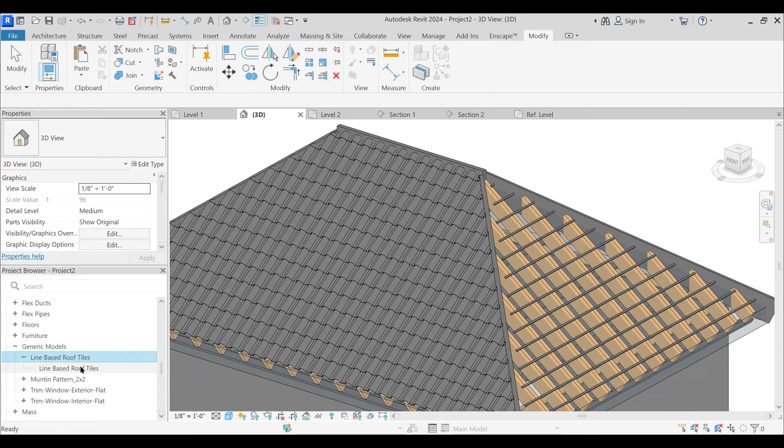Copy and rename and copy it here as well, and it would have the material parameter which needs to be passed on, or not passed on, we can just create one. And this roof tile material I will just duplicate and asset, and here too I will just duplicate this as well, and from here I'll just change this color to something different.

Okay, and apply and okay, and apply and okay, and I'll just drag this. And see, it has two options, that place on face, place on work plane. You can select any one of them. I'm just going to select this place on face.

And you see that blue line pops up showing that face. So I'm just going to drag from here to this point. And you see there might be some problem for this particular family, edit family. Let me check what it was.

Tile depth is fine. So see, here it is expanding. See, here it is perfect. Then why is it not? Revit sometimes behaves really weird.

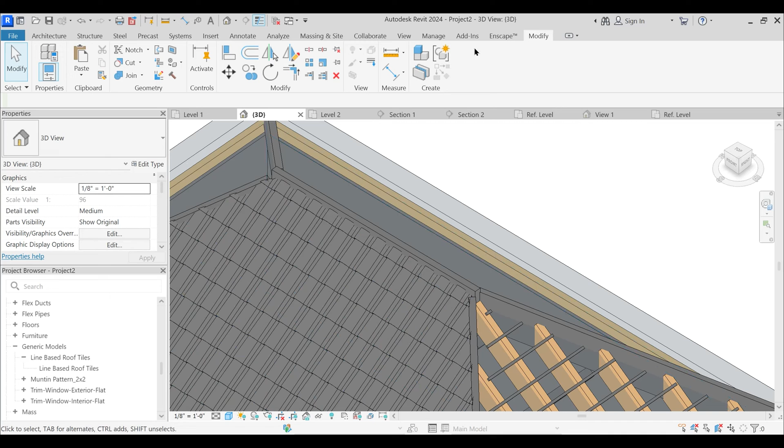Let's try it the other way around, wherein I'm just going to drag this and place on work plane. And for that, I'm just going to pick a plane, pick this plane, and then the roof tiles, place on work plane. And 1, 2, no, it is still creating a problem. So I actually need to check this.

Let's check it in that file. This is the tile width, CC, template file, length by buffer, and buffer is 1 feet 1.5, and tile depth is 1 feet 3. Wireframe. Yes, so the same step we did here, but I don't know why.

Yeah, okay, actually I suppose that this was not supposed to be created, tile width. So let's just delete that parameter, but we cannot delete it. First is that we need to assign this.

And in order to assign this length, which is an instance parameter, I need to change this to instance as well. And from here, tile width, I'll remove and make it equal length divided by tile depth. Divided by buffer, not tile depth. Sorry.

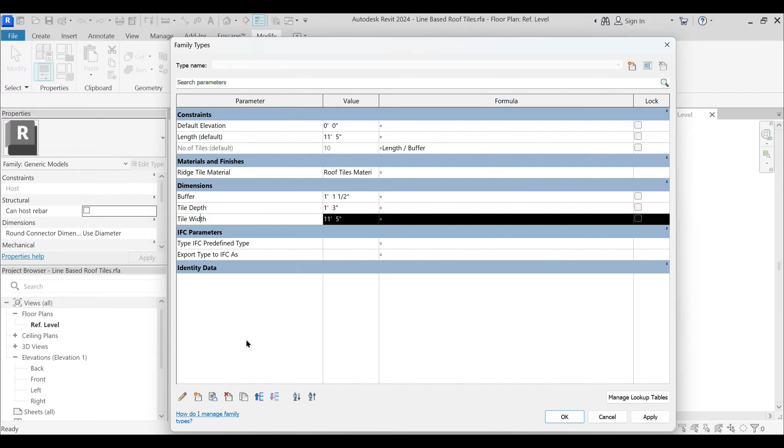Okay, and just get rid of this parameter. We don't need it. Apply and OK. Fine, and with all these changes, let's just load that back into the project. Okay. Overwrite existing version. And yeah, see.

So sometimes things, see, the problem was that, see, I'll just explain. See, this length is going to be an instance parameter, because Revit doesn't know where we are going to snap those tiles onto. So instance parameter because it has to instantly adapt to that face length in this particular file. So one step I forgot was that I unnecessarily created that tile width, and I don't know what process was going in my head at that particular time.

But actually I was supposed to keep this both instance parameter, okay, and use this length. So that was the only problem. Fine, so with that, now if I select

this SA and HI, if I just go to component, then it's line based tiles and place on work plane. But essentially you need to set the work plane, or you can just place it on face also. Now there won't be any problem.

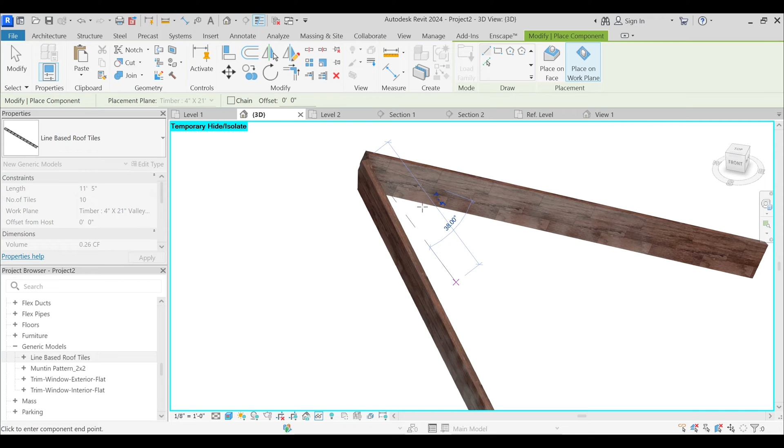So, line based component and line based roof tile, and place on face, select this face. No, it is not working that way. So place on face, pick a plane, place on work plane, and then component and select from this point to this point.

Architecture, set, pick a plane, select this plane, component, snap it from here to this face.

Likewise, architecture, set, pick a plane, and component, select this, and architecture and set and pick a plane.

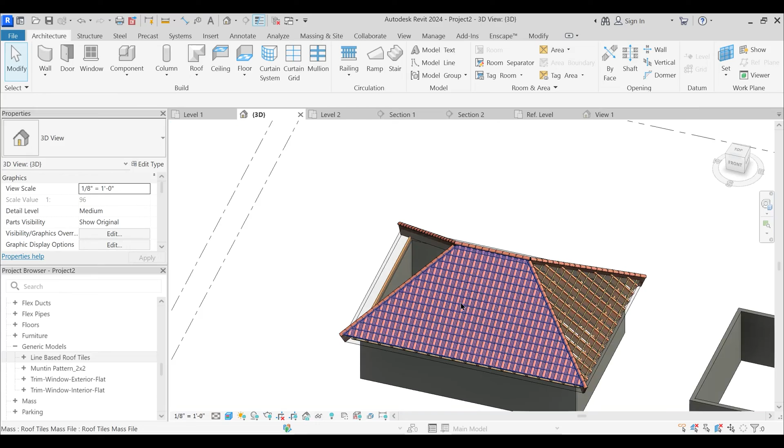This plane, SH or HL, component, and snap from this point to this point. Okay, and with that, turn it to realistic HR, and you see that it has been perfectly created.

Okay, only thing remaining is this particular roof. What I need to do is that I need a fascia board over here. So again, I need to go to roof and say fascia, and I'm just going to click this line.

And that fascia board occurs, but it's right now in this direction. Let's apply it on this face as well. Fascia, and yes, okay, and I'll select both of them, or let's individually select them, and you see that it has these flip arrows, which you can just flip.

Okay, and herein what you can do is apply a material to that also. I'm just going to use an existing material, apply and okay. And then what you can do is adjust the height. This is right now referencing this profile fascia 1x12.

So you need to go to profile section and fascia flat. Just drop this down, type properties and duplicate this and call it 1 cross 15, wherein the thickness, I'm just going to say 1 inch, and the height should be 15 inches, or let's say 18 inches, and rename it 1 inch cross 18 inches.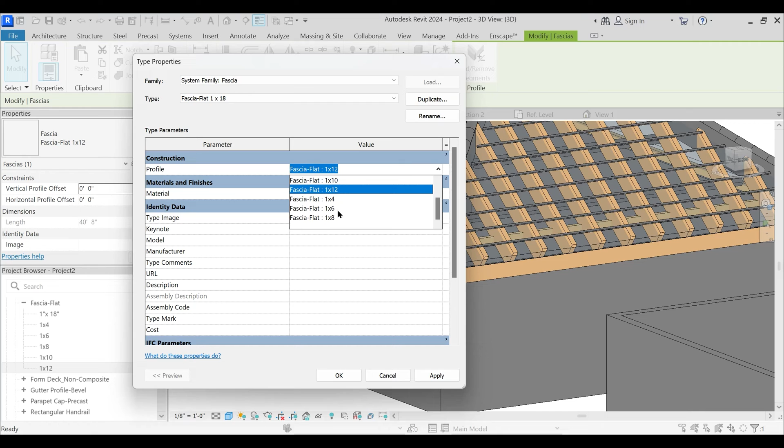Okay, and now in that file, just go to edit type and duplicate this and call this 1 cross 15 or 18. Okay, and onto that, reference the profile that we just edited and made this flat 1 cross 18 inches. Okay, apply and okay, fine.

So that is pretty much perfect. Also change this to 1 cross 18. Sorry, not that. Yeah, 1 cross 18.

Fine, and now onto this, we have to apply this. So let's apply this. I suppose that 1 cross 18 was too much.

So let's go to this type properties and make it not 18 inches, but let's make it 16 inches. I'm not renaming it right now. You just rename it, okay. And then we can see the edge.

Okay, and then go to roof and gutter and just apply it. Okay, and herein, I'm just going to change this material to something. Yeah, that's fine. Apply and okay. And just change it to R, enter.

Yeah, fine, so this is how you do the modeling part in Revit. Okay, the last step remaining is for this particular thing,

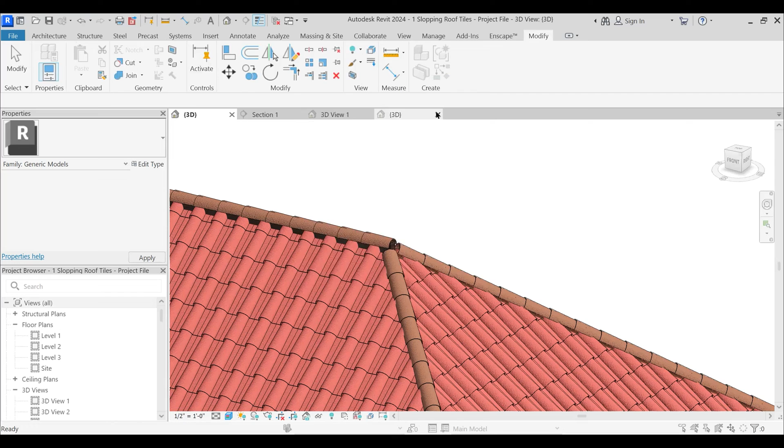wherein I'm just going to use this particular family, not detailed out, is that this is also a line based family, which is a custom fascia. I'll just edit this particular family and save it on desktop so we can use it. Save and just close it.

And herein, I'll just open it and go to desktop. And where is that? We just saved it. Yeah, custom fascia, and just open it. And that is also a line based family. And just load it into the project.

And with that, I'll just go to 3D. And herein, under generic models, or let's say component, we have that custom fascia and place on work plane, or let's say place on face. But place on face is not working. I don't know why. Let's say that just drag and yeah, place on face.

And with that, this face selected, HL, with this face selected, just drag it from here to this end. And with this face selected, let's drag it from here to here.

Okay, and just enter. Fine, so we have perfectly created that.

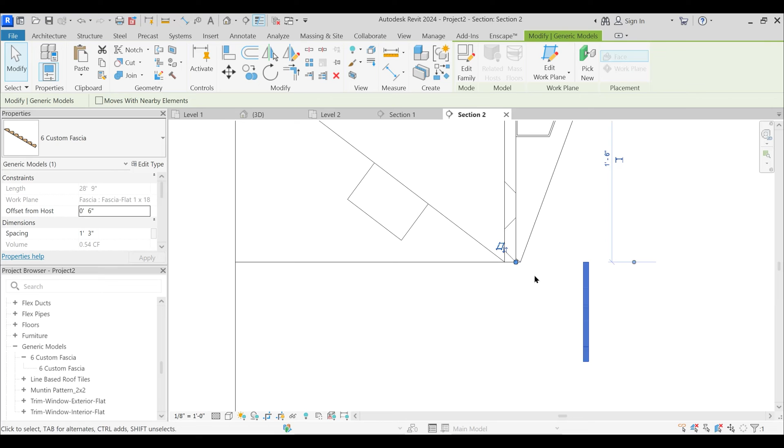If you want to change the position of that decorative fascia element, just go to any of the sections, and herein you can give it an offset of, let's say, 6 inches. Move and disjoin and change it to 4 inches. Fine, and likewise in this section also, move it 4 inches. Okay, let's go to 3D, and you see that particular thing has been perfectly created.

Now, creating this, I just loaded it from a different file because I didn't want to waste time, but this is very simple. You just go to edit family of this, and you see that this is also a line-based family. Line-based families are the ones we created using a generic model and then loading that generic model into the line-based template file. It's that same process.

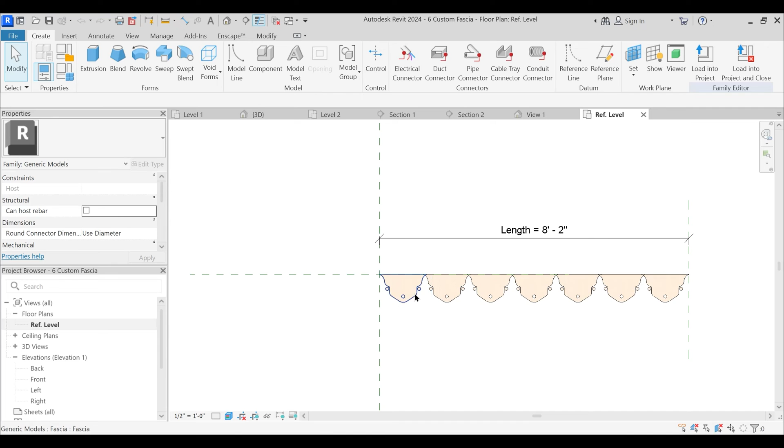If you go to the reference plane, you see this is again a line-based family which has this instance parameter length, and the number of elements by length by spacing. That same methodology has been used, and this is just a generic fascia file where the extrusion has been created. Going to reference level and giving it a spacing - this is nothing but a simple extrusion. Extrusion start 0 and extrusion end half inch, so this is just an extrusion.

You can design whatever you want, but importantly, after designing that decorative fascia element in the generic model, you need to load it into this line-based family and then multiply it. Once that family is created, you load it into the project environment and make it a face-based element, and you can snap it. Now if you go to this particular section, you see that it perfectly appears. So this particular thing has been achieved.

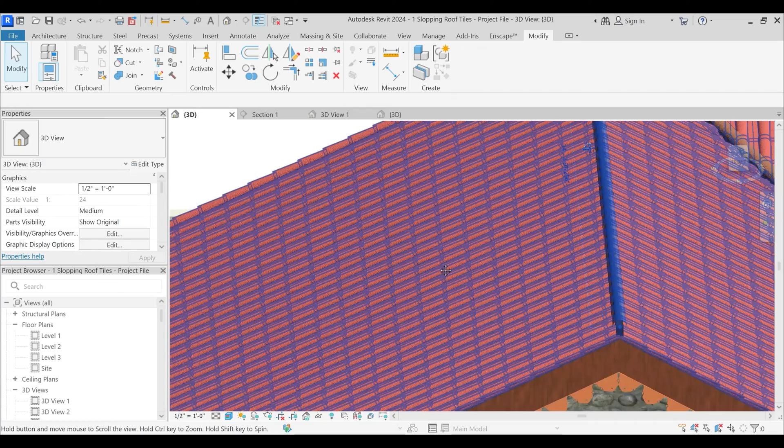Only thing left for this file is that I want to show you how to create a truss member for this particular roof. This same process follows entirely for creating this custom roof, and the same method has been followed. You see that by selecting that particular work plane, the glitch of the roof tile not reaching this ridge board has been rectified. So there is no rocket science in creating this particular thing.

I'm just going to quickly show you how to create the truss member which follows the slope of the roof. So again, I'm going to go to level 1, architecture, roof by footprint, place at level 2, with an overhang of 2 feet. I'm going to create one simple roof, but this time it's going to be a gable roof. I just select both of these and uncheck define slope, and just create that.

Okay, so the modeling of these elements remains the same. Only thing is how to lay the truss members on this part, following the slope - that's very simple. You just go to structure and truss. Right now no structural truss is loaded in the project - would you like to load one? Yes, I'll go to the same path, RVT 2024 libraries, English Imperial US, and under that, instead of structural framing, this time I'll select structural trusses.

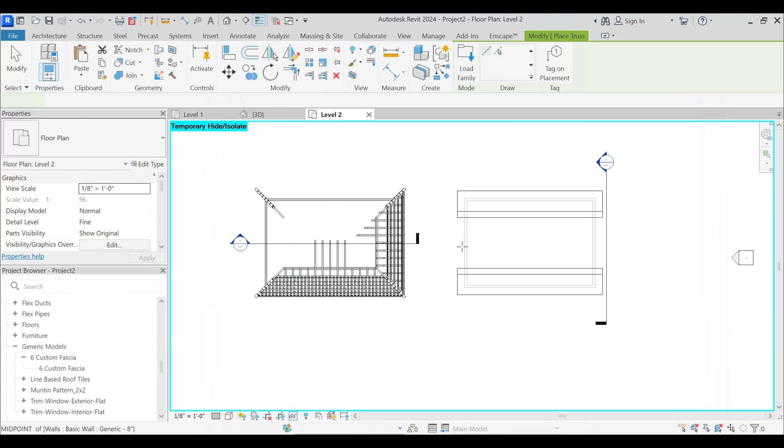Herein I have a simple 6 panel truss, but I'm just going to select this one, with the work plane at level 2. I'll select this point and this point, and that truss has been created.

If you see, what you need to do is create the members of this truss, which by default has been selected as rafters. So herein I'm going to go to this timber and define two more. One of them I'll just duplicate, since we're using the same size and type properties, and call this truss web members.

Another is going to be these purlins, wall plates - yes, wall plates - I'll type properties and duplicate this, and call it truss top bottom chord. Okay, and with that I'm just going to click OK.

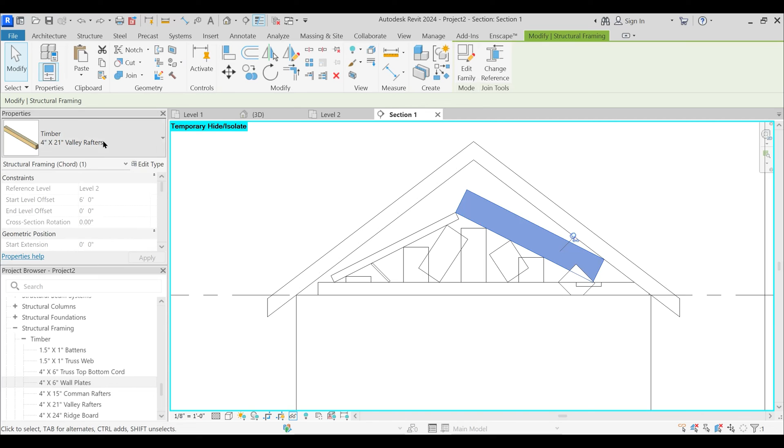Now in this, I'm going to press tab and select this - top bottom chord, yeah fine. And for this, I'll select the same top bottom chord. Actually, I can edit this particular truss system only - so herein, for top chords, I'm going to set the framing type to be this top bottom chord that we selected, and the vertical webs to be the truss web members, and the diagonal webs also to be the web members.

Where are you? Web member, and bottom chord to be also the same, this truss top bottom chord, apply and okay, fine. So that will do the job. Now you need to adjust this height.

If I select this particular truss, let me change to wireframe. If I select this truss, you see that the bottom chord is the member which is slightly getting inserted in the wall. But if I select this and drop down, you see that the truss height is 6 feet. So where is it reading 6 feet from?

It is reading that 6 feet from center of this to center of this. So in order to align this properly, first I'm going to move, and with constraint unchecked, I'm just going to move it. Now what you need to infer is what should be the height of the truss member entered in order to match this profile.

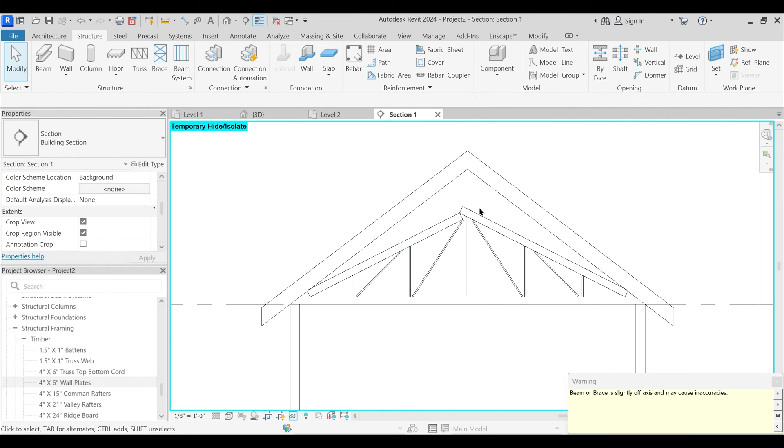So in order to do that, I'll just measure this. Let me hide this. Let me hide all of this and say, what is the distance? This is 9 foot 3 inches.

Now, as I explained, this is snapping to center of this and center of this, which height it is reading. The height of this is 9 foot, and this is 3 inches, and also from center of this is 3 inches. So what we need to do is compute this height in such a way that we deduct 3 inches from top and bottom, and what remains will be the height of the truss that will properly position this particular truss.

So what we need to do, how much is it? H and 9 foot 3 inches. So 9 foot 3 inches minus 3 inches is 9 foot. Let's just try first, 9 foot. Yes, okay, perfect. And now it is following the slope.

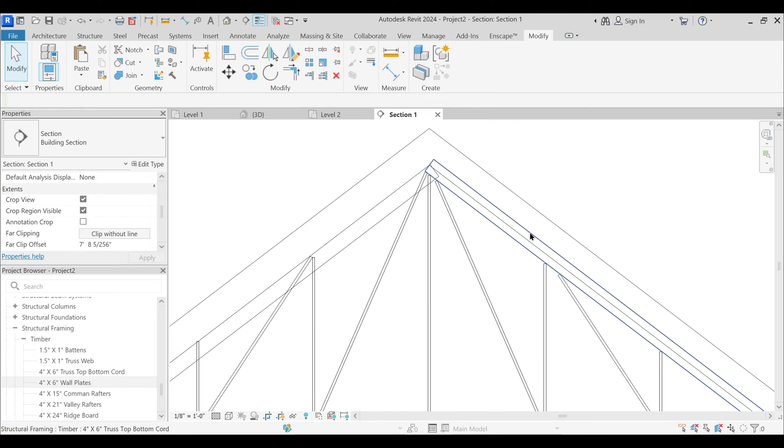What we need to do is select this, MV enter, and with this join checked, move it from this point to this point and pin it again. With this, now you have your perfect truss member following this roof slope, and rest everything remains the same. Clear, everybody?

Now, I'll take you to this particular file. This file has the truss member completely different. See, this particular truss has only the top chord and the bottom chord. But this truss has the top chord and this extra bottom chord, which is not present in that file. If I select this and go to edit family,

then there are no vertical bottom chords, no vertical members over here. So in order to achieve this, what we need to do is I'll drop this down, and I have already edited that truss system. Structural trusses, go to this PTS truss, expand it and edit it. So that will open up the template file.

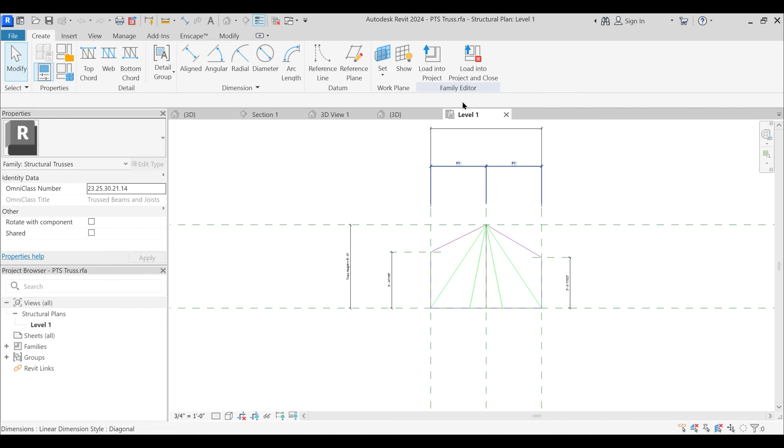Depending upon the gradient of your roof, you have to design this particular truss system in its template file. You have to edit, lay the reference plane, give the heights and constrain it. With that, when you load that into the project environment, it will accept that height.

So that is how that particular truss system has been designed. If I go to level 1, and take you to this particular horizontal section, you see that this is the roof, and this is the truss, which is exactly following that particular slope. That is how that truss member is laid here.